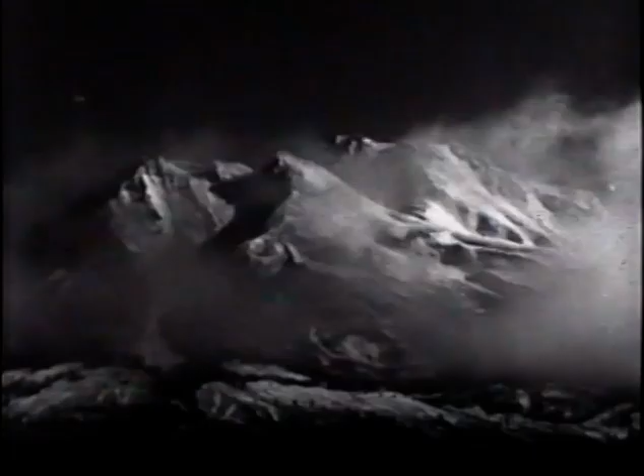From the very beginning, man has struggled ever onward in his conquest of time and space. For countless centuries, lofty mountains mutely challenged him, standing as stalwart barriers across his path. Upon the oceans that surrounded him, he launched his ships. At the mercy of wind and tide, they made slow headway across the waters.

Over the lowlands, the wilderness of desert and green valleys, he plodded his weary way, earthbound in the conquest of time and space. But man is no longer earthbound, and Lockheed rides the airways with a thrust of bright propellers and the flash of gleaming wings.

And behind this Lockheed lies aviation history. In 1903, on the plains of Kitty Hawk, North Carolina, this history began. In the granddaddy of all modern planes, the Wright brothers won immortality by sustaining flight in a heavier-than-air flying machine.

There is no fuss or ceremony, no cheering crowds. The motors sputter and catch, weights drop, the ship catapults off the ground into the air for the first flight on record. Since then, aviation history is written in a never-fading book of records.

In 1928, a Lockheed Vega, the well-known Yankee Doodle, reaches New York from Los Angeles in 18 hours and 58 minutes. At the controls are Colonel Arthur Goebel and Harry Tucker.

In 1929, Captain Frank Hawks climbs aboard his Lockheed to set a new transcontinental mark. Good luck, Captain. New York is only 3,000 miles away. Off on his way to a new record, one of the many he is to establish in the years that follow.

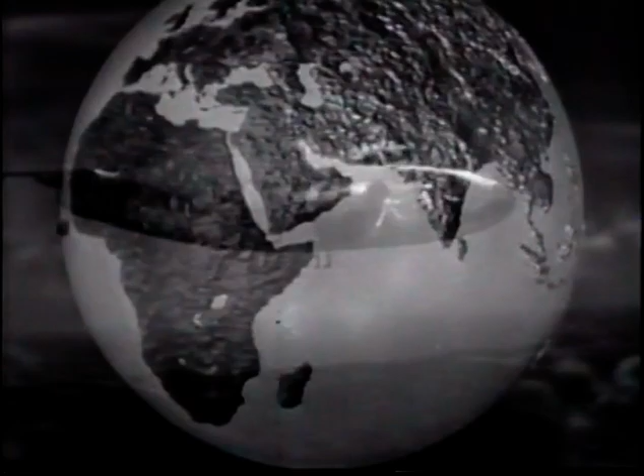And for the convenience of all customers, service and parts depots have been established throughout the world to maintain the peak performance of Lockheed's vast fleet. And in all corners of the globe, 24 hours of every day, these ships fly the airways in routine flight, confidently accomplishing the jobs for which they were built, the conquerors of time and space.

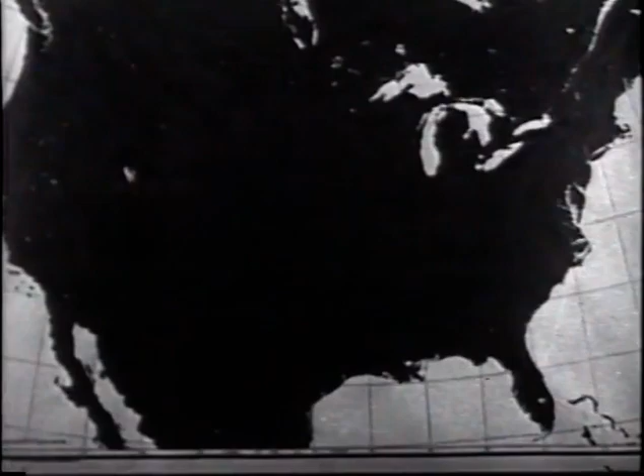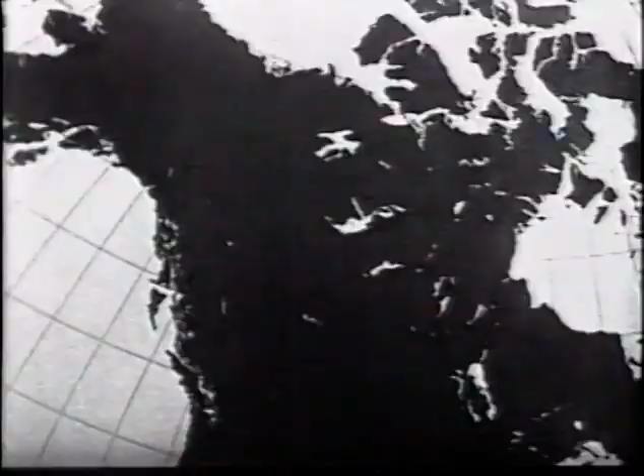Lockheed over North America: United Airlines, Continental Airlines Incorporated, Mid-Continent Airlines Incorporated, Northwest Airlines, Chicago and Southern Airlines, Braniff Airways Incorporated, National Airlines, Delta Airlines, Boston Maine Airways Incorporated, Trans-Canada Airlines, Pacific Alaska Airways.

Lockheed over Central America: Líneas Aéreas Mineras, TACA, Compañía Nacional Cubana de Aviación. Lockheed over South America: Pan American Airways Incorporated.

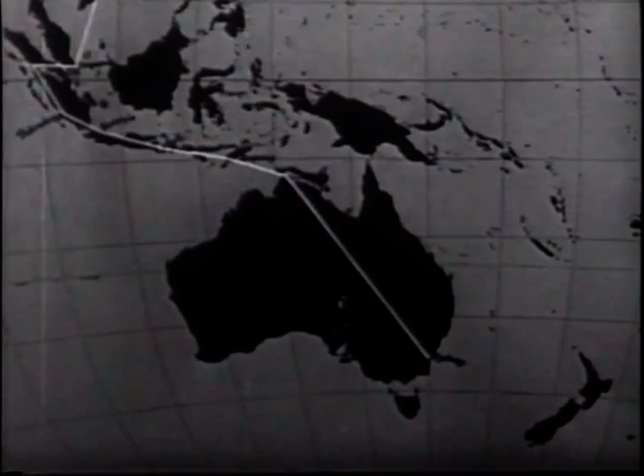Lockheed over Africa: Air France, Air Afrique, Aéro Maritime, South African Airways, DETA. Lockheed over Europe: British Airways Limited, Aer Lingus Teoranta, KLM, LOT, Aeroput, LARES Romania, Air France. Lockheed over Asia: KLM, KNILM, Japan Air Transport Company Limited. Lockheed over the Antipodes.

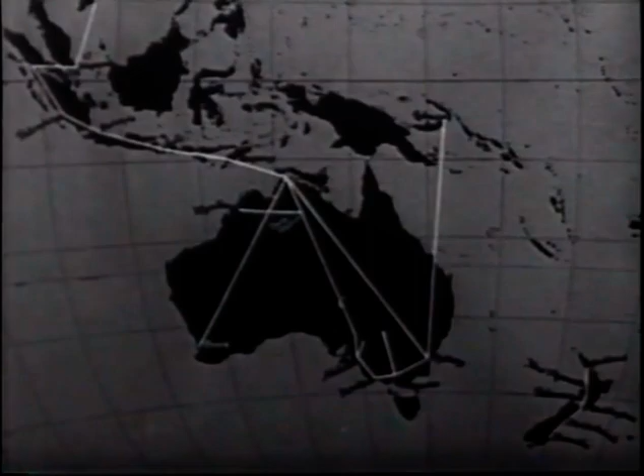KNILM, MacRobertson Miller Aviation Company, Guinea Airways, Ansett Airways Limited, WR Carpenter Airlines, Union Airways of New Zealand. Lockheeds also serve high government officials of the Netherlands East Indies, Mexico, Venezuela, Brazil, Argentina, Australia, Canada, Great Britain, India, and the United States.

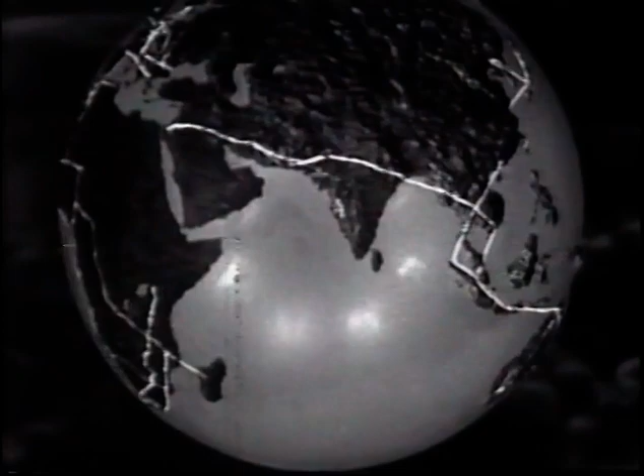Worldwide coverage, but it has not been accomplished in a day. It is the result of a smooth-running combination of men and machines. In that combination lies the story of Lockheed itself. It is a success story, modern, exciting, typically American.

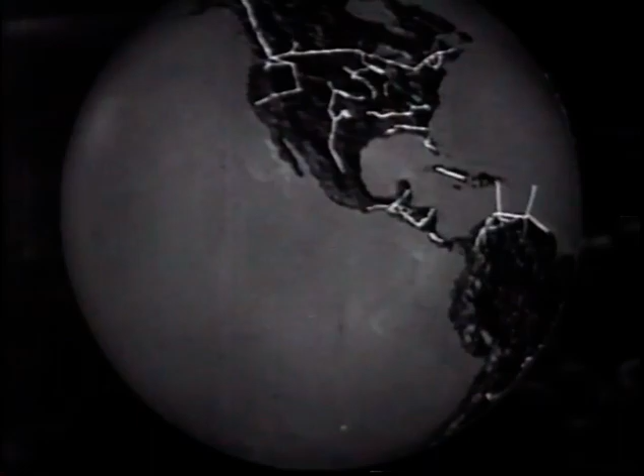The Lockheed Aircraft Corporation plant, Burbank, California, in 1926. And today, the same company, the same location, but quite definitely not the same plant. As recently as 1932, sales aggregated the overwhelming total of $23,298.03. In 1940, actual deliveries amounted to more than $42 million, and conservative estimates indicate that in 1941 this figure will be more than doubled.

And to the men of Lockheed belongs a large share of the credit, to their skill and to their loyalty. They are a cross-section of typical American workmen: drillers, riveters, tool makers, die casters, machinists, and technicians. In 1931, there were only 300 of them. In 1941, over 35,000. Every man who checks in, from office boy on up, has taken and passed exhaustive tests covering intelligence, temperament, and special aptitude to prove his individual ability.

35,000 American workmen, the right men for the right jobs to build the best planes. This is not a trick shot made with mirrors.

It is the drafting room of the engineering department where every new Lockheed has its beginning, a beginning conceived with the purpose of supplying the answer to definite needs of the aviation industry. To attain this goal, over 850 engineers make over 5,000 drawing plans, devoting a total of over 200,000 work hours to their mission of creating one new design.

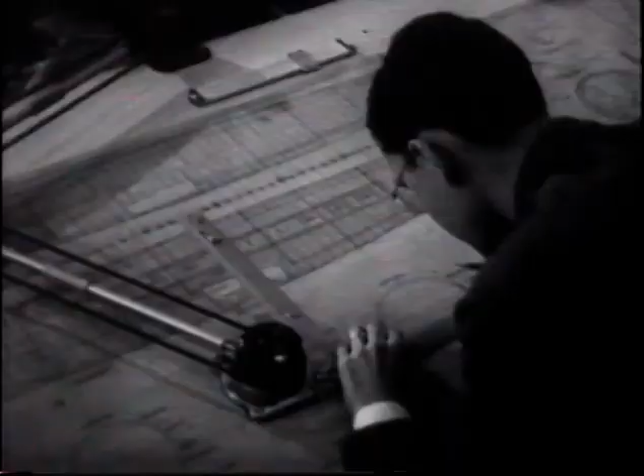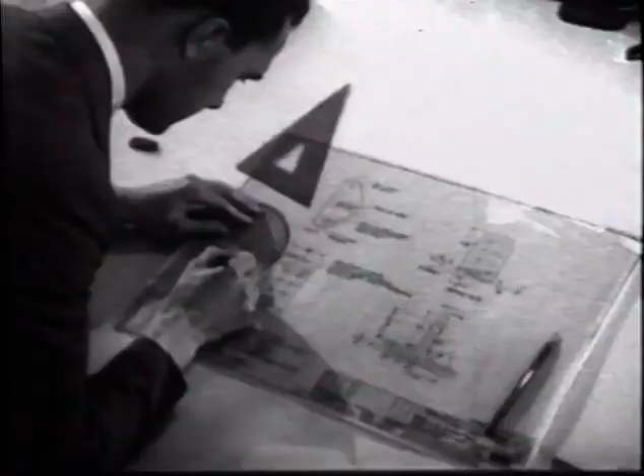The component parts of a modern airplane's wing, fuselage, and tail surface are almost countless in number, yet every single one of them must be engineered. Even the most minute part receives the greatest attention. Four separate drawings are made showing detail from four different angles. Although the part is no larger than a silver dollar, it will have to go a great deal further.

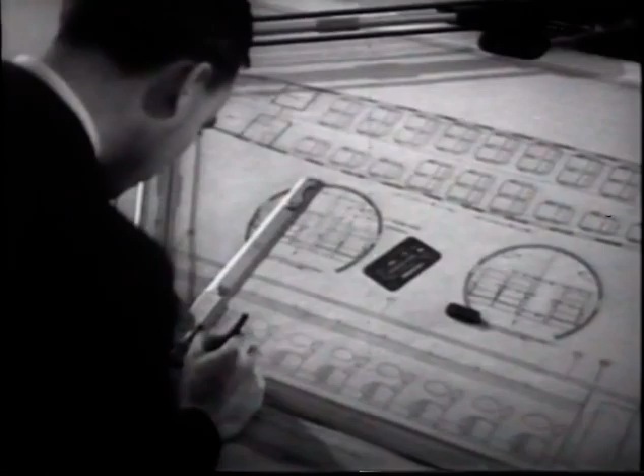The interior of a plane is one feature of design seldom associated in one's mind as coming under the supervision of the engineer. Yet one of his most important jobs is to provide utter comfort for passengers traveling through the air at high speeds. The Lodestar's cabin has been designed for this comfort.

Inside, the sound of powerful motors is reduced to a pleasant hum by scientific soundproofing and vibration control. Restful chairs, ample space, and headroom are results of thoughtful planning, and all Lockheeds are especially adaptable to the requirements of private owners. For businessmen to whom time means money, the Lodestar is convertible into a convenient and dependable office in the sky. The compact 12 becomes a comfortable lounge for attending important events anywhere at any time.

The cabin of Lockheed's new four-motor transport, the Excalibur, will look very much like this. Although the plane is still under construction, the engineers have built an exact replica, known as a mock-up, out of wood. In this way, every possible detail of passenger comfort can be effectively predetermined and applied.

But the ideas and plans that this man and the hundreds like him put into execution are not only those of Lockheed's chief engineers, but those of the entire flying world. The Market Research Division maintains close contact with the operative branch of the industry. The staff compiles lists of important features relating to a plane's design. These findings are set up in the form of questionnaires.

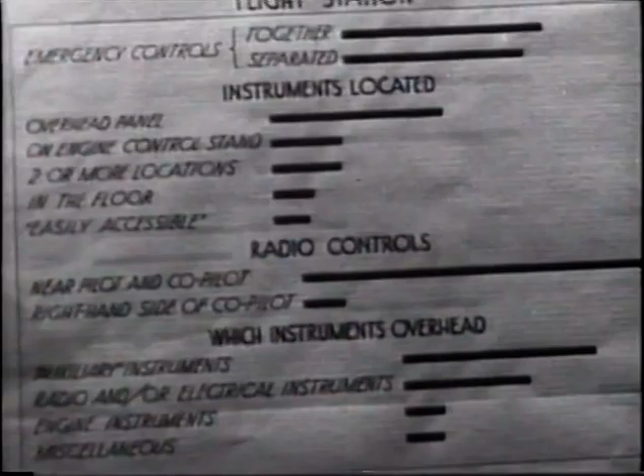The replies to these pamphlets are carefully sorted, for they represent knowledge gained under actual flight conditions. Detailed graphs and charts are compiled by competent statisticians. No suggestion is too small. Every answer to every question is checked and noted.

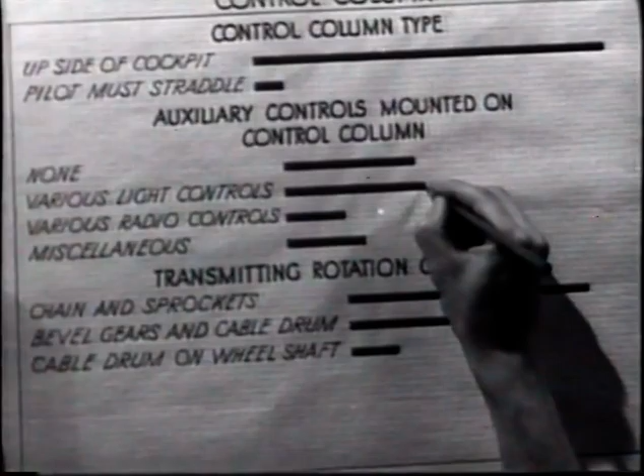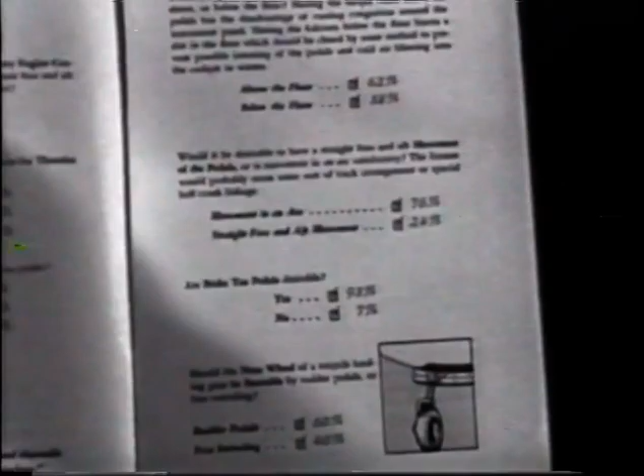These findings are recorded in another pamphlet: you told us this is the way you would do it, on flight station, on engine control stand, and on rudder pedals. We asked, are brake toe pedals desirable? 93% said yes, 7% no. That verdict is submitted by men whose combined opinions represent the experience of over 16 million hours of flying.

These practical viewpoints, as gathered by market research, are submitted to the engineers. They combine these ideas together with their own creative ability in the conception and building of every new Lockheed plane. That's how Lockheed designs airplanes to suit the men who know airplanes best: operators, pilots, and regular airline passengers. And the first form a new plane takes is on paper.

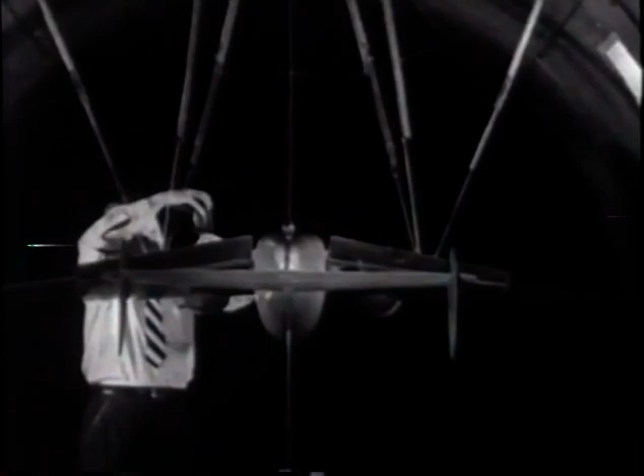From these drawings and thousands like them, an exact scale model known as a wind tunnel model is made and is connected to instruments which determine its flight characteristics. The model is hand-carved, accurate to the fraction of an inch, weighs over 500 pounds, and costs more than $5,000 to build.

The door is closed, the wind tunnel sealed. A flip of the switch and the wind propeller whips up to speed. The model is exposed to a far higher velocity than this 90-mile-an-hour wind. The small wind tunnel model is actually subjected to and withstands a much greater force.

From an idea to an actuality, from theory to fact, from a model to a completed Lockheed, the plane has been built. More than that, into it has been built the strength, ruggedness, and durability necessary for its safety and high-speed performance. But not so long ago, this shining plane was only a small part of a trainload of metal addressed to Lockheed.

For the metal inside these wooden frames is the stuff that planes are made of. Hard and strong, it must be fabricated by men and machines into the parts that make airliners.

Giant shears act as huge mechanical scissors. Metal sheets are slipped into place. The sharp blade strikes and cuts through them as if they were cloth.

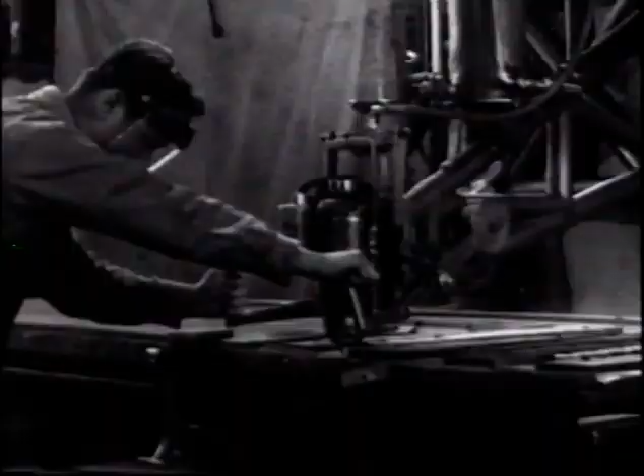The high-frequency router, a dental patient's nightmare, turns 15,000 revolutions a minute and cuts layers of metal into their first rough shape. The bit turns so fast that it must be cooled by a constant stream of oil.

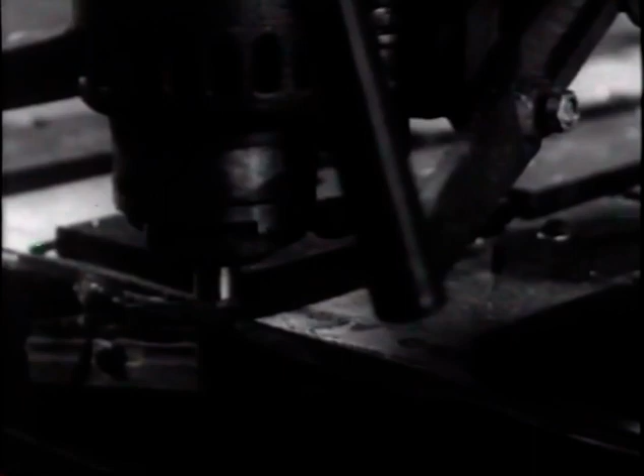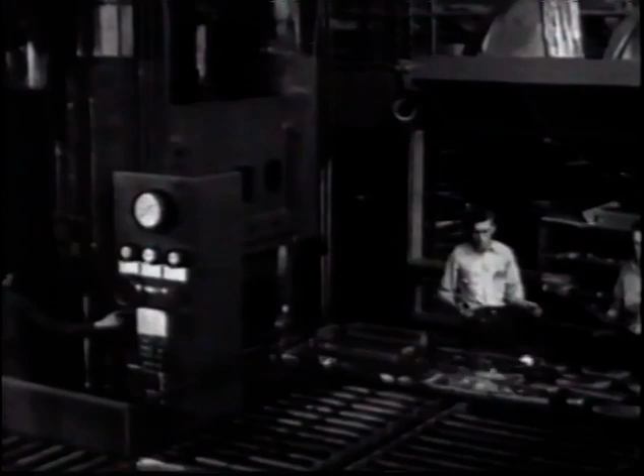The massive hydro press exerts an overall pressure of 9 million pounds, and it literally squeezes parts out of metal. An endless chain of roller conveyors carries a tray with the forms to workmen. They put the metal, which has already been cut to the correct size, in place on the forms.

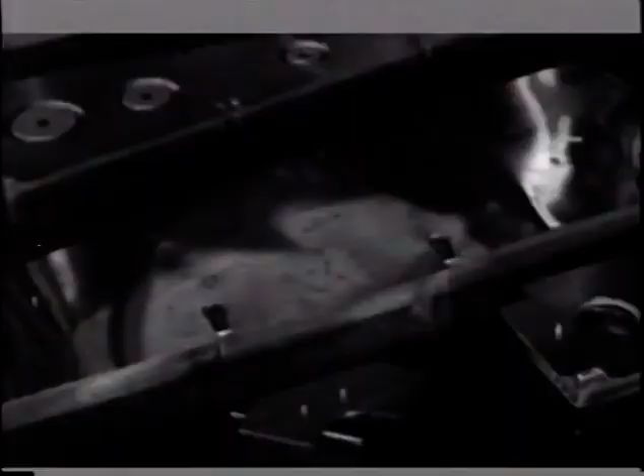The tray now continues on its way into position under the press. The operator touches a switch, the press starts down, and look out below. Almost unbelievable pressure, an irresistible force, but under perfect control.

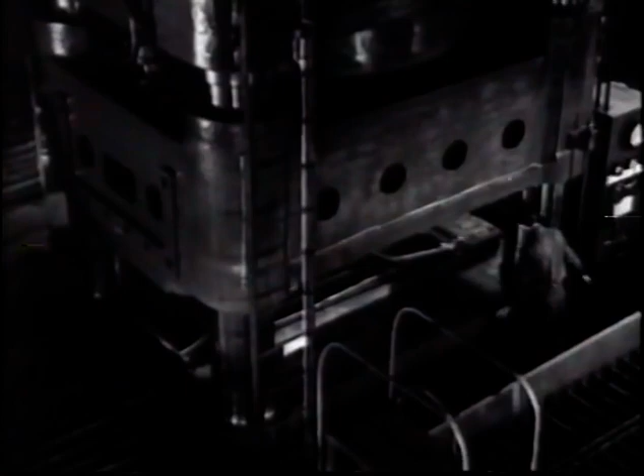And where plain sheet metal went in, finished parts come out. The hydro press turns out more parts in 1 minute than 2 men could complete in a whole day, and turns them out better and more accurately.

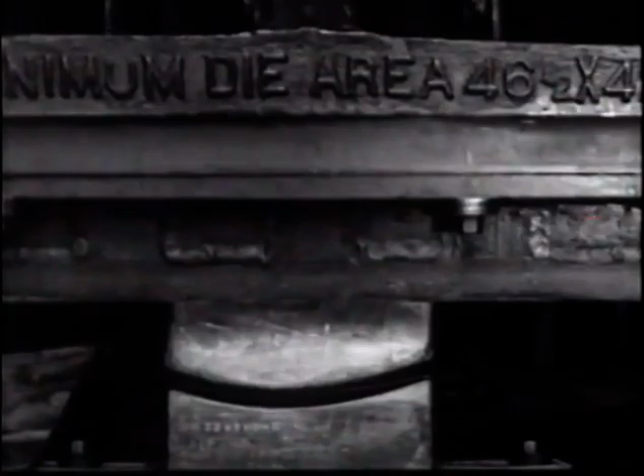A compressed air stamp which forges metal is an excellent example of powerful machinery under absolute control. Taps as gentle as a tack hammer, then the crushing impact. What a nutcracker this outfit would make.

And yet its control is so delicate that it can crack an egg, at least so the operator claims. Look out there, a little too hard and you'll have an awful mess. Be careful.

Well, hello, stranger. You certainly have a brand new kind of a mama.

Skilled men and precision machines have fabricated these parts. But even metal can be strengthened and protected. To do this, there are several types of processing.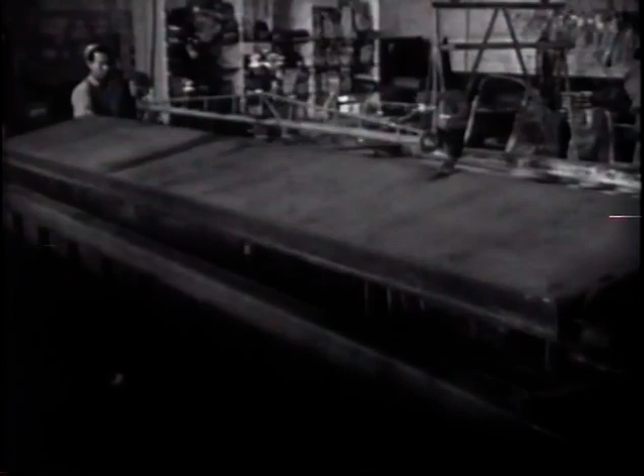Complete electrochemical anodizing baths provide parts with a protective coating of oxide film. This is a safeguard against the threat of corrosion caused by moisture. It is an interesting fact that these parts are protected against any harmful effects of moisture by being given a bath. Another type of bath is used for a different purpose.

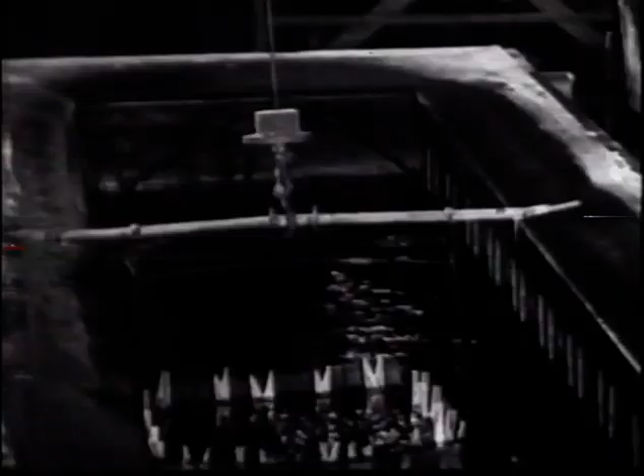In order to harden and thereby strengthen certain parts, they are immersed in a hot salt solution of sodium potassium nitrate. In large ovens, other parts are hardened by baking at 1550 degrees Fahrenheit and quenching them in oil.

It is easy enough to say that these parts, which will eventually be the plane, are strong. To prove that they are, to constantly guard the Lockheed measure of strength is the duty of the testing laboratory.

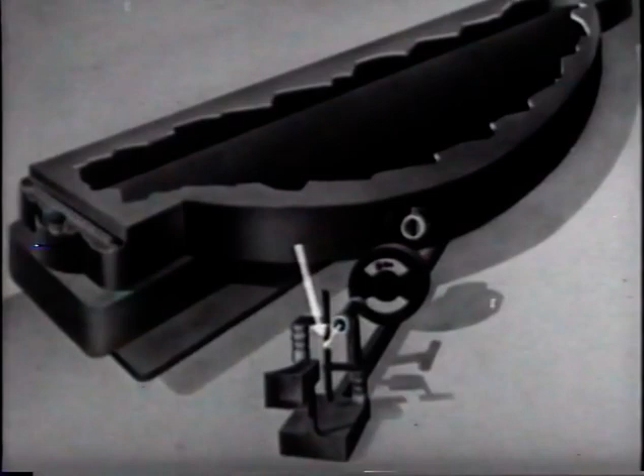A spectrograph is one of the most modern scientific testing devices. It analyzes the purity of the metal alloys which go into a plane. Tremendous heat created by an arc burns sample filings of the metal. These filings are placed in a cavity on the lower of 2 acid-treated graphite electrodes and then burned.

The light of the burning metal passes through a lens and then through a rotating sector, the adjustable opening of which controls the amount of light falling on the slit. The light now passes through the slit and falls upon a diffraction grating. This diffraction grating is a concave aluminized glass plate on which 24,000 lines per inch have been ruled with a diamond point. The light is separated by the grating into wavelengths.

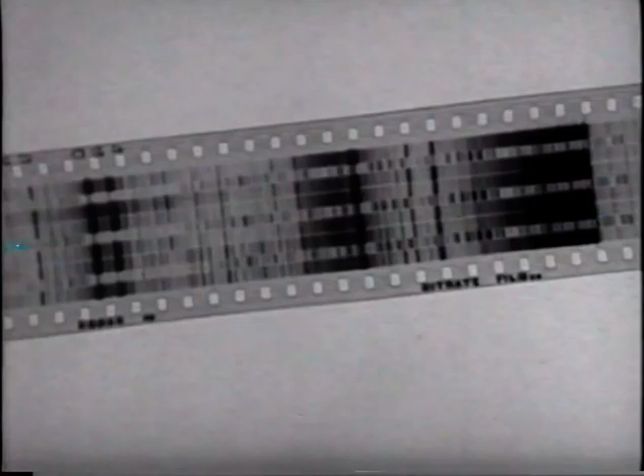These wavelengths, or light rays, fall upon a strip of film, and a photographic record of them is thus produced. Since each element has its own wavelength, from the developed film it is possible to determine exactly which are present in the alloy. In this manner, the spectrograph immediately detects all impurities, and any inferior metal is promptly discarded.

The sole purpose of this huge machine is to break things. Its powerful jaws, capable of a compression of 300,000 pounds, are about to crush a small section of the wing in order to measure its resistance.

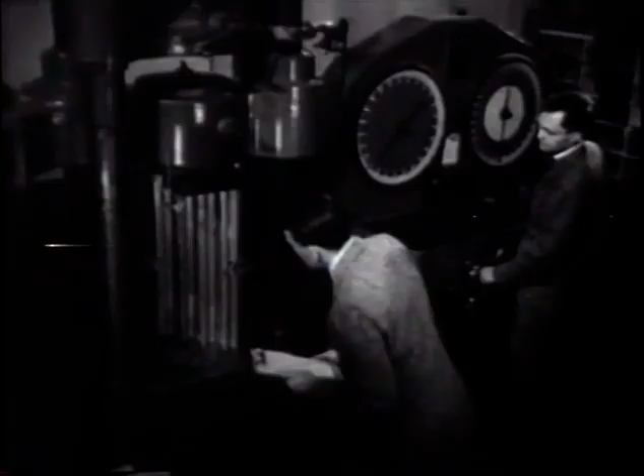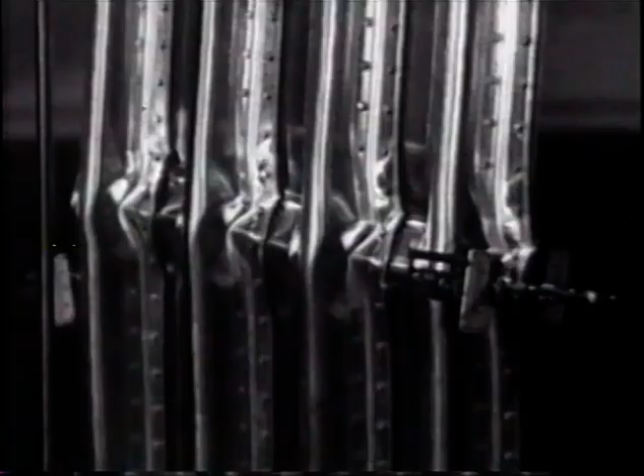Now watch carefully. The upper jaw is clamping down with an invisible, relentless force on the seemingly frail strip of metal. But actually, just how frail is it? 60,000 pounds? 70,000? There it is, a slight ripple. The breaking point has been reached, and it takes a pressure of over 80,000 pounds to even bend this frail little section of a wing.

For contrast, let's see what happens to a solid cylinder of concrete, which certainly appears much stronger. There is the first crack, and the concrete shatters completely under a pressure of less than 75,000 pounds.

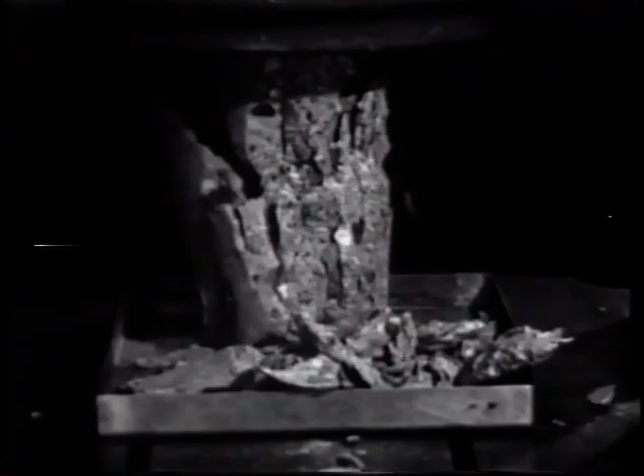All stressed parts, such as forgings and castings, are X-rayed for any possible flaws in the metal. Lockheed X-rays more parts than all other aircraft manufacturers combined. They may look new and shiny on the surface, but that doesn't matter. What are they like underneath? This batch is fine, perfect. A different story here—those slight, almost imperceptible flaws which doom it to the scrap heap would be invisible to any eye other than the X-ray. Therefore, although it is important to know what is on the outside of a plane, every stressed part is X-rayed because Lockheed thinks it is even more important to be absolutely positive of what is on the inside.

Yes, every part of this plane is built for the strength, ruggedness, and durability to achieve the highest speeds. And there goes the Lodestar. Carrying a full load of 17,500 pounds, it speeds down the runway for the takeoff. In 15 seconds, after a run of only 860 feet, it leaves the ground and soars into the air. Climbing rate: 1,200 feet per minute.

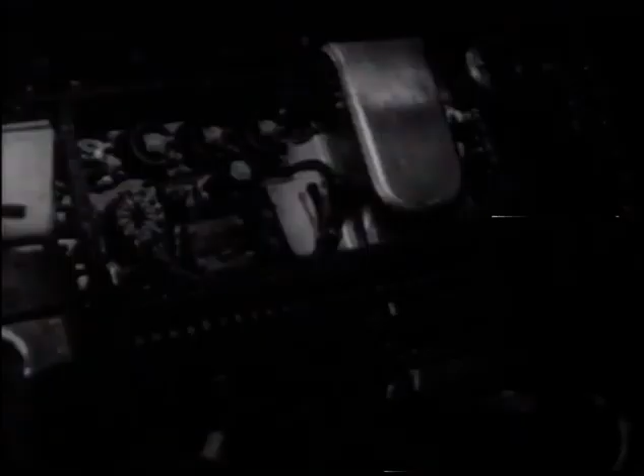While the plane is in flight, the dials and indicators on the panel are the guides by which a pilot flies. Over a half a mile of wire connects them with the controlling instruments, which must be infinitely accurate before they are installed. In the instrument testing laboratory, each instrument and accessory is, to all intents and purposes, actually flown before being installed on the plane itself.

For instance, on this stand, a motor duplicates the swing of a plane to test the turn and bank indicators. Here, tachometers are also tested, along with propeller governors, vacuum pumps, fuel pumps, starters, generators, and hydromatic motors for feathering propellers. The automatic pilot is checked by a vacuum system against mercury manometers. This small box can guide a plane in flight, keeping it as true to its course as the most experienced pilot.

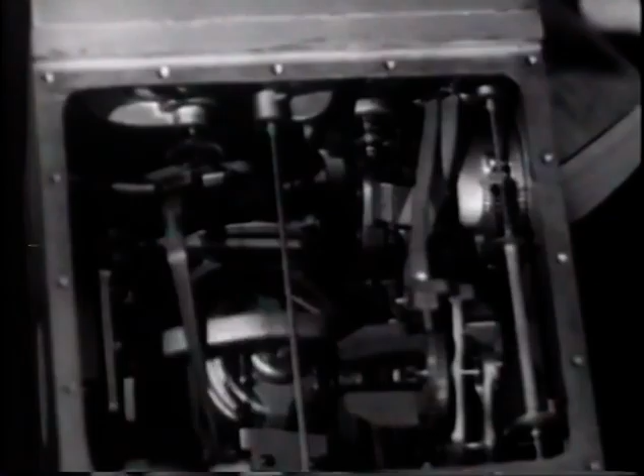An airplane is a chain of which the thousands of separate parts are the links. They must be forged together in order to shape the wing, the tail, and the fuselage. The duty of the wing is to provide the lift that sustains the flight of an airplane. Here in the plant, it must be assembled as flawlessly as it was designed.

Although a wing is generally considered as a unit, it is really composed of 3 parts: 2 outer sections and the center section. We are all familiar with the general shape of a wing, but while an outer section is in the first stages of assembly, we can get a good idea of the complex structure on the inside. Every rib and crosspiece has its purpose. Remember, it was just a small part of the wing that we saw withstand a compression of 80,000 pounds.

Each operation is executed with precision and care as the outer section moves down the production line and takes shape. High-speed electric drills punch holes for the rivets. There are more than 700 drillers or riveters who have all had previous training. Even so, before they're assigned to actual production, they must attend Lockheed's own school until they can uphold the plant's standard of efficiency and skill.

There are more than 50,000 rivets on a completed wing, and every one of them is checked, examined, and checked again. This requires an army of over 200 inspectors, such as this one. By the time a Lockheed plane is assembled, every square inch of it has been inspected at least 5 times. Inspector number 158 finds this row perfect and okays it.

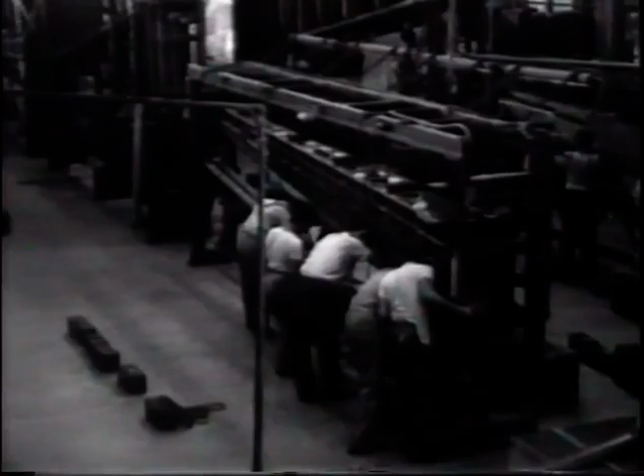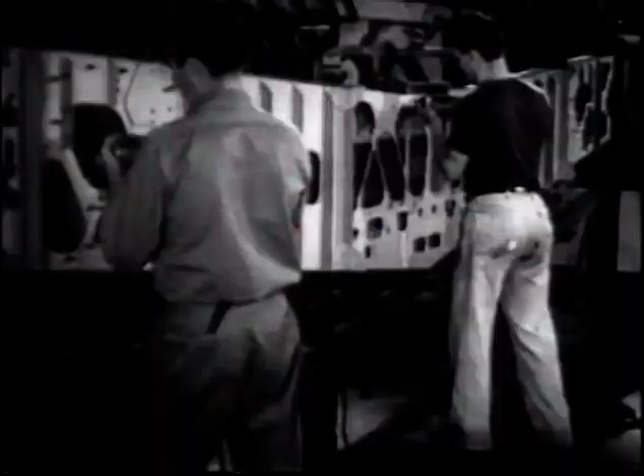The assembly line for the center section of the wing is one of the largest and most vital units in the plant. It has to be, because the center section is the strong man of the plane. It must be constructed and assembled so as to be able to support heavy loads and to withstand great strain, for it unites the 2 outer wings with the fuselage. The fuselage will eventually rest in the gap between the 2 shoulders, and the wings will be joined like arms on either side. The main beam of the center section is the strongest part, the backbone of the entire plane.

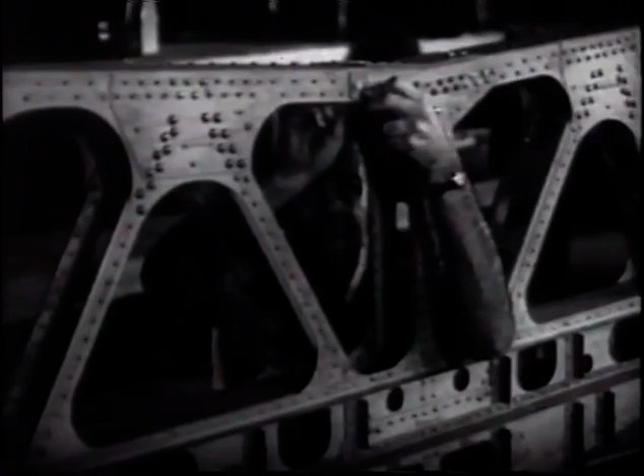Like a bridge, it must carry any burden with steadfast dependability. And the main beam is built just like a bridge. At all times, it carries all of the flying load, the engine load, and the landing load, and it is stressed to support more than 5 times the total weight of a fully loaded plane. Completed and assembled, capable of supporting a static load of 70,000 pounds, the wing will do its job as the men who built it have done theirs.

The tail surfaces control the maneuverability of a plane. The use of twin rudders was developed by Lockheed and is one of the distinguishing features which point out every Lockheed. The fuselage is the body of the plane.

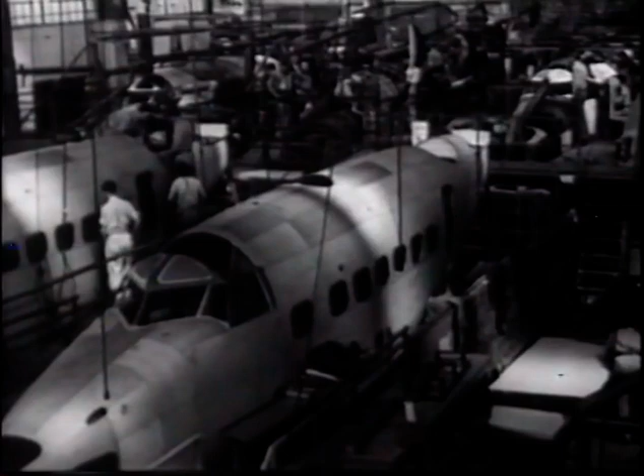It represents the final word in aerodynamic design and streamlining. During construction, these basic principles are built into the fuselage and applied to every operation from the beginning to the completed shell. As the first step in assembly, the bulkheads are joined together by stringers, which form the basic shape and strength of the fuselage.

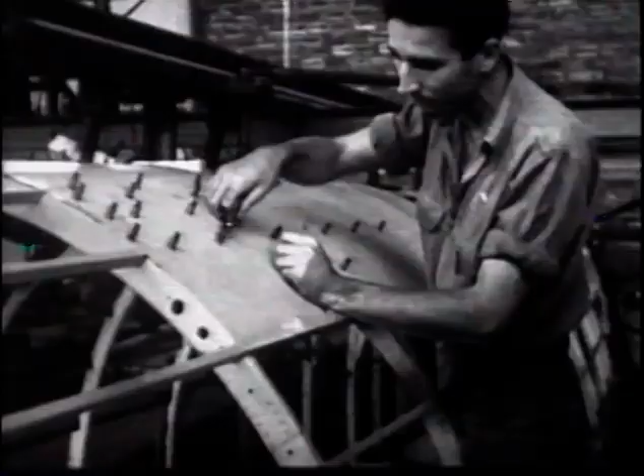Skin fitters then fit and shape the metal sheets, attaching them with removable fasteners. On their heels come the riveters, while every stage of the assembly is constantly under the close check of inspectors. Assembling with electric continuous spot welders facilitates production and gives many fuselage parts an extra smoothness for better streamlining. With an eye to the future, Lockheed is constantly enlarging on this process because better streamlining means greater speed.

And so another fuselage is finished and ready for mating with the wing. Like a ship being launched, it moves slowly down the ways. Slowly now, yes, but for just a little while longer. Soon sunlight will be glinting from its metal sides.

Its nose will point upwind. In the comfort of its cabin, passengers will read or write or sleep or think after their own fashion, and beneath it, the lakes, rivers, and valleys of the countryside will unfold. Slowly still, the fuselage is lowered into place, united with the wing, and now, slow no longer.

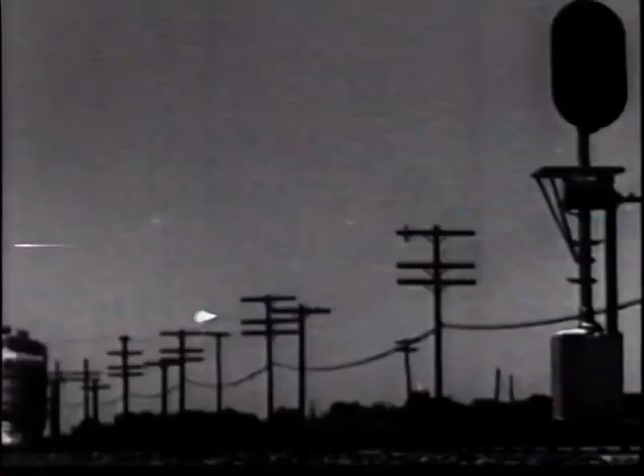Speed on the water. Speed on the snow. Speed on wheels. On rails. Speed on wings. There is truth in the slogan that it takes a Lockheed to beat a Lockheed.

As the plane approaches the field, it slows down for the landing. The Fowler flap has been adopted and developed by Lockheed. The flap gives a greater lift to the wing and provides a brake action to reduce the speed. The plane lands at 65 miles an hour, and from a height of 50 feet, it can come to a complete stop in less than 600 yards.

This Lockheed Lodestar, with its safety, its comfort, and its great speed, typifies the ideals of aviation in America. To protect these ideals, Lockheed is contributing its share toward national defense and the defense of democracy in other parts of the world.

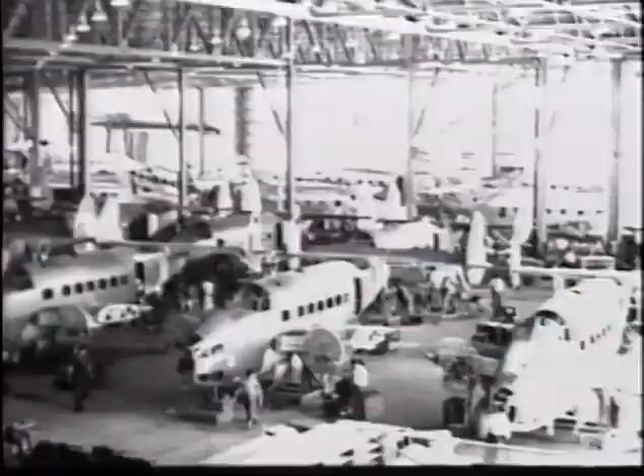These B-14 bombers, better known as the Lockheed Hudson bombers, are rolling off the production line at an ever-increasing rate. They have been ordered in great quantities by Great Britain and Australia.

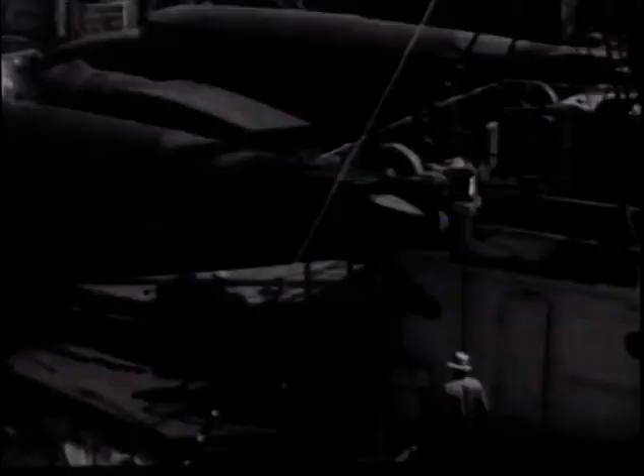When ready for delivery by boat, the Hudson bombers are dismantled. The sleek fuselages are carefully encased in canvas, and the wings, already stowed away below deck, are crated in wooden frames for safe shipment. When the planes reach their destination, they are easily reassembled and soon ready to take their places in the staunch defense of the British Empire.

And while these planes start on their long journey by water, others are being given their final test flights for the tough job ahead. And still more are winging their way directly toward Canada. In combat, in actual line of duty, the Hudson bombers have won a name for their efficiency and dependability.

As America builds its planes for commerce and for defense, it is well to remember that Americans invented the airplane and developed the modern conception of mass production used by Lockheed.

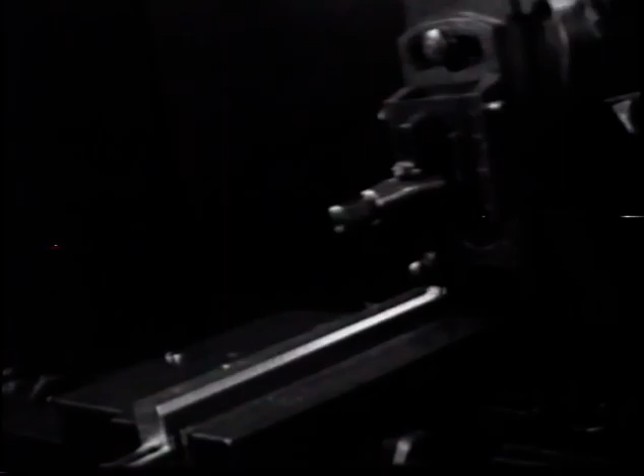And out of the vast production line come Lockheed's: the 212, the Electra, the 12, the Hudson bomber, the Lodestar, and now Lockheed's answer to the challenge of our times, the Interceptor Pursuit P-38.

It has been developed solely for national defense, and Army officials consider it the fastest military plane in the world today. The P-38, a man-made comet.

The P-38 is a completely new development in conception and design. The purpose of this deadly single-seater fighter is to prevent any would-be attacker from reaching his objective. Lockheed is building vast quantities for the United States Army, and many of its features are closely guarded military secrets.

But it can be revealed that the P-38 will climb a mile in a minute, and its motors are so quiet that it can approach any target almost without warning.

And as wings soar higher above America, so are soaring the hopes of free men the world over. For they know that whether it be for commerce or defense, ship for ship, American planes have no equal.

And just as Lockheed commercial transports serve the people, so do the Lockheed military planes stand ready to serve should the need arise. The striking power of Hudson bombers, the speed of the P-38.

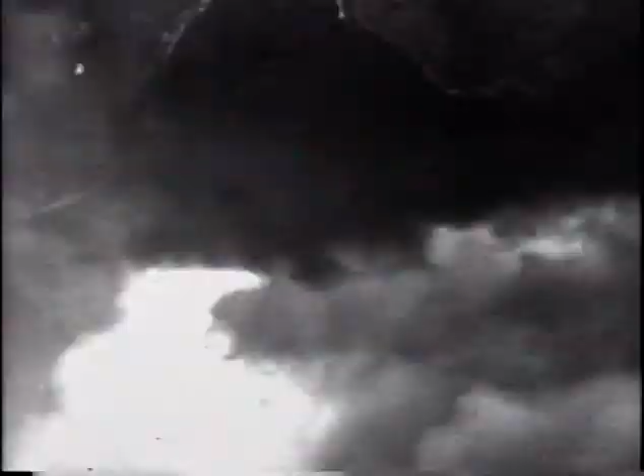Envisioned by Lockheed, engineered by Lockheed, built by Lockheed. Wings of eagles for the protection of our country. Wings of progress for the prosperity of our people, today and tomorrow.

And the airplane of that tomorrow, who knows what it will be, for the march of aviation has been so swift. But whatever it is, the world will look to Lockheed leadership then as it looks to Lockheed for leadership today.